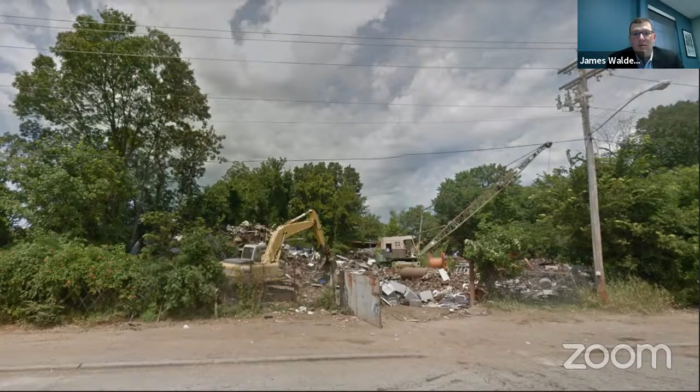As you all are aware, this started out as the scrapyard, and I think that's probably one of the really beautiful elements of this entire project—we're taking something that was literally so ugly and an eyesore within the community and transforming it into one of the best spaces in Conway. That to me is particularly exciting.

It's particularly neat about this project that it does have this high aesthetic quality that makes it so unique. In addition, it's going in the Markham Street neighborhood. I think this is a signal and commitment of how much that particular neighborhood matters to our community, and so I think that's very exciting as well.

So this is the overall design of the project. You'll notice at the top edge of the image, that's where water comes in from the north, and it winds along in that kind of snaky part along the side, where it's treated and then goes out.

So the idea behind this project is that there's sort of three elements to it. The first of which is that it's a water quality demonstration project. In essence, you could consider it a down payment on helping improve water quality of the storm drainage and water that we have going into Lake Conway.

So the elements coming in—runoff, pollutants that are coming into the site—the water will actually be leaving here cleaner than when it came into the site because of the unique plants that we have on there that will be absorbing a lot of those pollutants.

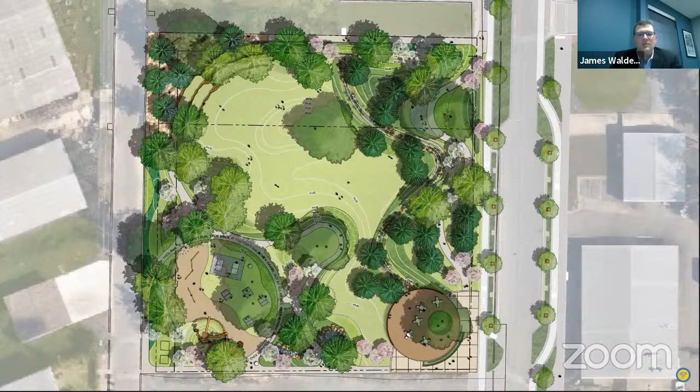From looking at the picture, you can tell that this is a very high quality urban park that is unique. We don't have anything like this in Conway. There really won't be a lot similar to it within Central Arkansas, so it's going to be a really unique asset that I think will be very catalytic in helping development within that area.

So, very important improvement that's being made. Looking at this, we've broken it down into several key parts of the park. The first being the entry plaza on the southeast corner. This is the area closest to downtown, and it's being designed in a way that's intended to help invite people into the space from downtown, traversing along the Markham Street corridor.

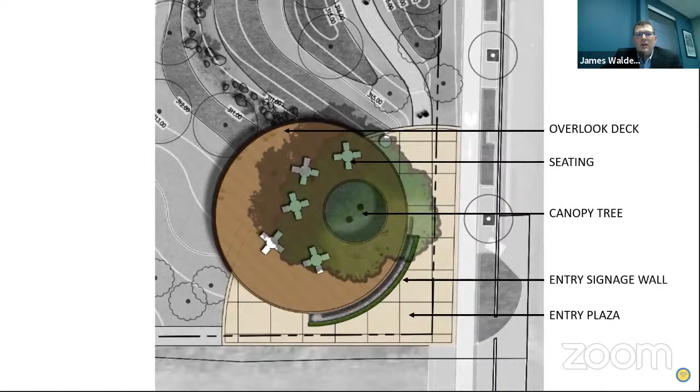As you can see in the image, we've got a nice plaza space, some artwork, which hopefully will be a quote wall dedicated to Dr. King. We may have some other type of artwork dedicated to Dr. King in that space, but it provides this nice inviting environment that says, hey, come walk in here, come explore it, come loiter. That's what we want you to do in a park—look around and enjoy the beauty of the environs there.

Our next is the bioswale—that's the treatment area where the water enters toward the north side and flows down to the south. You can see here all the beautiful plants as they would look when they're flowering. A lot of these native species, I think, will be really unique and interesting. If you've been out to the constructed wetland at Hendrix, that—or better quality—is sort of what we're looking at in terms of how that looks.

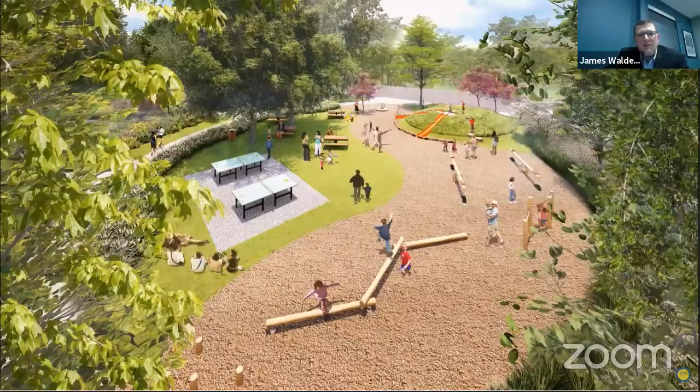This being a park, we wanted to have some level of play area that incorporates multiple things. We've got some neat elements in there—embankment slides for kids, a play area where kids can balance along beams, and table games that hopefully help incorporate some of the identity of the neighborhood, along with picnic tables. This is kind of the appearance of how that is—a place for families to bring children, allow them to run around, have fun, and enjoy the area.

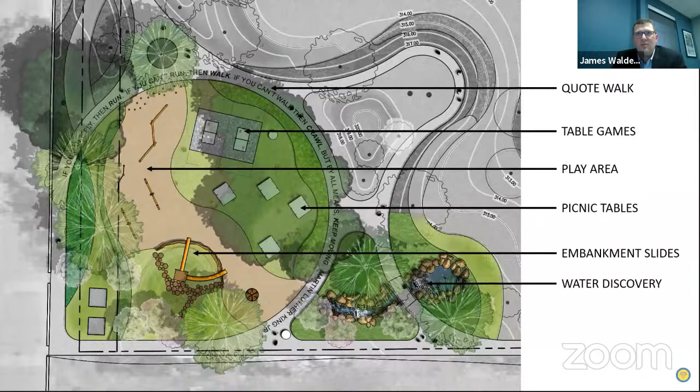You can't really see it very well on this, but going back, there's a water discovery area where—I'm not going to say water play necessarily—but in terms of looking at the water, there'll be some little mechanisms where kids can release water out of a certain area and allow it to flow down into another area. I think that'll be helpful and useful in understanding some of the educational aspects of why the park exists and what it's intended to accomplish.

Another is our performance area, and this is where we'll have essentially what amounts to a modified type of amphitheater. That's something that came up a lot in the public engagement and talks—there was a lot of discussion about wanting some type of performance space, even if it's an informal one.

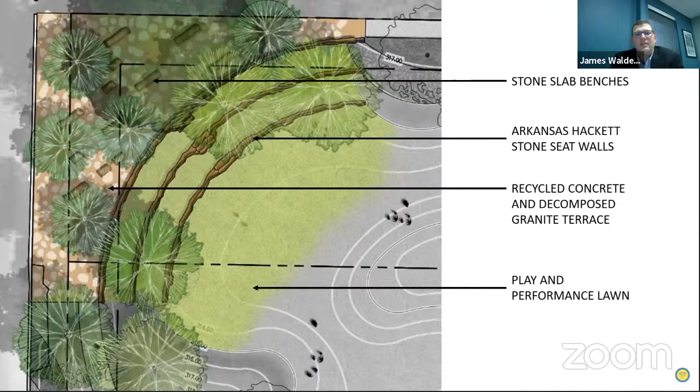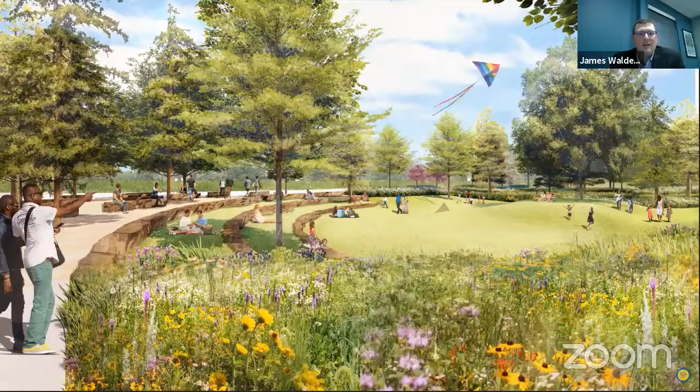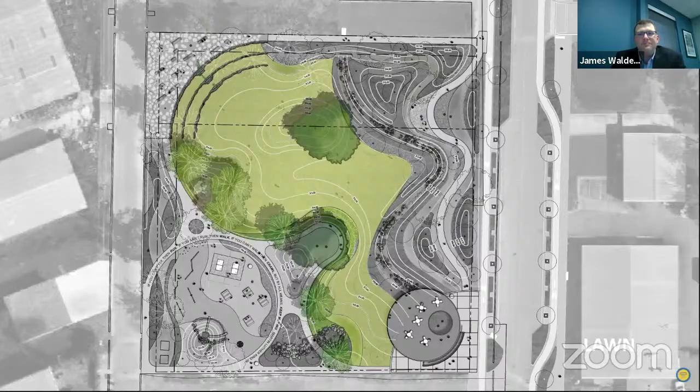Some of the neat elements there—it's going to use recycled concrete from the existing site, giving that connection to its previous use. We'll also be using Arkansas Hackett stone walls and stone seats, that really beautiful type of stone you see up in North Arkansas. There's actually a town called Hackett out in West Arkansas that has that. Those benches give it a rustic, natural look that pours out into this great lawn, which will actually be used for part of the stormwater storage or detention during rain events when it backs up. That's kind of the image of that—it'll have varying elevations through there that give it a lot of visual beauty.

So, again, this is a pretty beautiful park. I think it's something you all will be very proud of, that collectively the residents and stakeholders in Conway will all be proud of. I think it's going to be a very important project for us.

James, that looks great. I think you said 2022 on the start date of the construction. Is that right? Yes, sir.

Thank you. Who's going to do that work, James? That will have to be something that ends up getting bid out. One of the things in the consultant we selected, SWA out of Dallas, because this project is unique with a lot of unique plants, is that part of their proposal includes having people involved in the project during construction, to make sure the intent of their design is carried out. For us, selecting that group was very important because this is unique and different. There aren't many projects like it around here, and I think having that element will ensure we get a good quality product at the end.

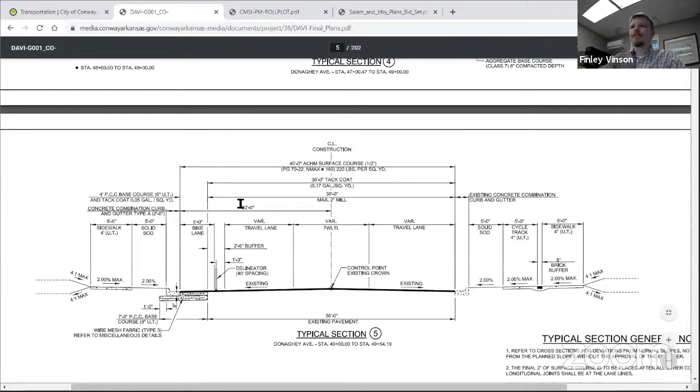Now I'm going to show you very quickly what Donaghey is going to look like. So this is, I'm going to scroll up just a little bit here. There we go. So on the southern section, starting at Dave Ward, Donaghey is going to have the first buffered bike lanes in Conway, we're excited about that. It's going to have bollards to separate the cyclists from the travel lanes.

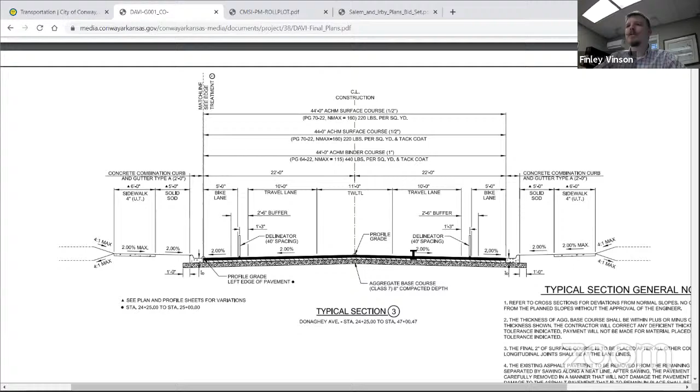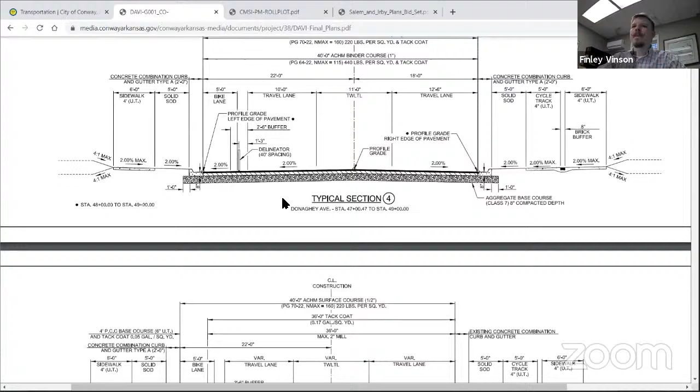We don't have a street sweeper that will fit in that space, so UCA has very kindly and graciously offered to help us keep those clean. As you move north, the street gets narrower, and we're only rebuilding the section south of Robbins. So we're utilizing the existing pavement to put in a buffered bike lane on the west side of the road, but we're going to put in a cycle track on the east side of the road, separated from the sidewalk by a brick inlay. Then as you move further north, the bike lane will drop at College Avenue, and you'll have cycle tracks on both sides. So that's what you can expect to see on Donaghey after it has been completed.

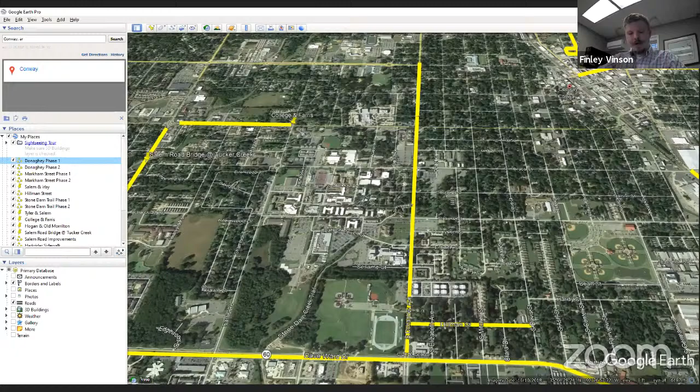I'm going to go back to my Google Earth here, and we've talked a lot about Markham Street already. As you know, phase 1 is under construction, and that extends from Van Ronkle to Walnut, which is right there. Everybody see Google Earth? Okay, good.

Conway Corporation and CenterPoint Energy are currently working to complete the utility relocation of that first phase. They're also working on the second phase at the same time. Construction of phase 1 is about 50% complete and is scheduled to be completed in the spring of next year. Phase 2, which will go from Walnut all the way to Harkrider, is scheduled to commence before phase 1 is completed, right about the same time phase 1 wraps up. The whole project, phases 1 and 2, should be completed probably early 2022.

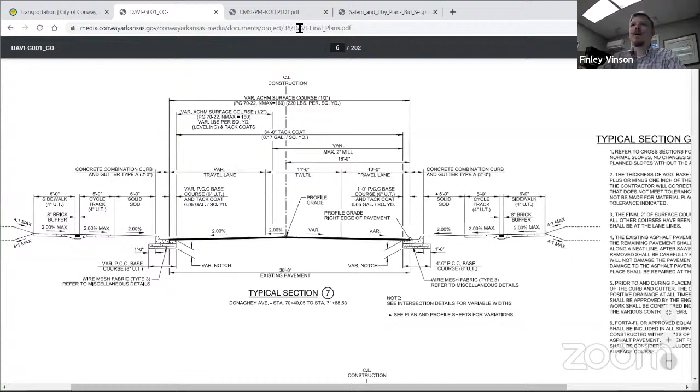That project is similar to Donaghey in that it's got cycle tracks. This was a Metro Plan grant, which required several things, including that it be bicycle friendly and pedestrian friendly. So it's going to have cycle tracks on both sides of the road, separated from the sidewalk by a brick inlay. It's also going to have bioswales, which will work in tandem with the Markham Street water quality project. We're excited about that one.

Now, Salem and Irby, we talked about just a moment ago. The construction here is ahead of schedule, and the final paving is expected to be completed next week. The project will be completely wrapped up probably in the middle of next month.

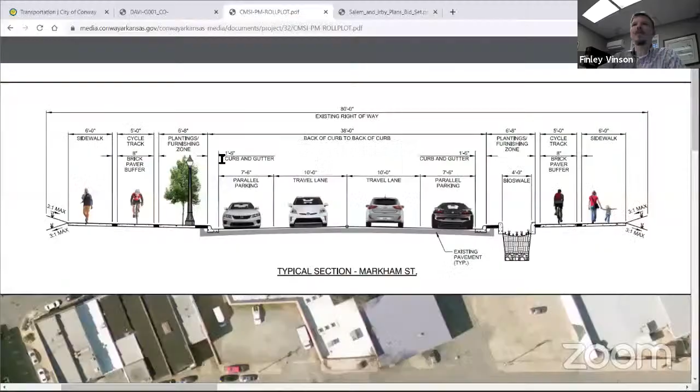This is what it looks like right now. Many of you have seen it already since some of you have driven through it, but this is what it'll look like when it's done. I've already heard a lot of compliments on this. We're really excited. My hat's off to the contractor and Conway Corporation — they've worked really fast on this one, kept traffic moving, and done a really good job.

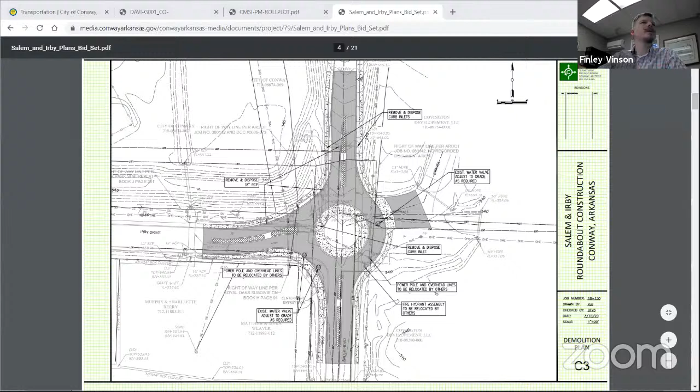Now we're going to go to Hillman, another one the mayor mentioned. Street crews are working out here right now. This is where it is. Utility relocation and drainage installation are underway currently. We expect that to be done early to mid-summer.

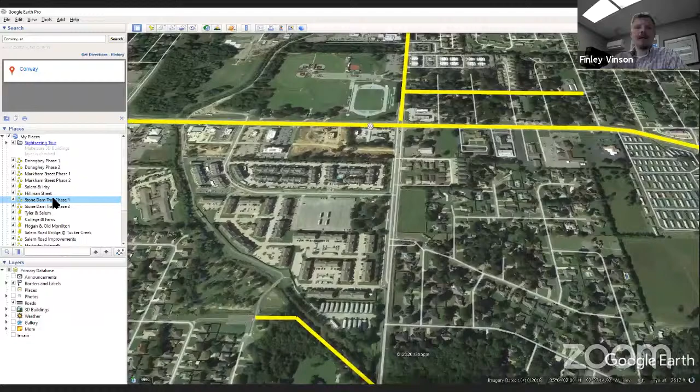So, a few other things we're working on. We're working on a bunch of grant projects right now. Stone Dam Trail Phase 1 is a grant project we won from ARDOT that takes us from Mimosa to Donaghey — that phase will actually take us underneath Donaghey. Construction is scheduled to begin this spring. Phase 2 of this project, which we have a current grant application to ARDOT out for, we hope to hear back favorably on. If awarded, that will extend the project all the way down to South German.

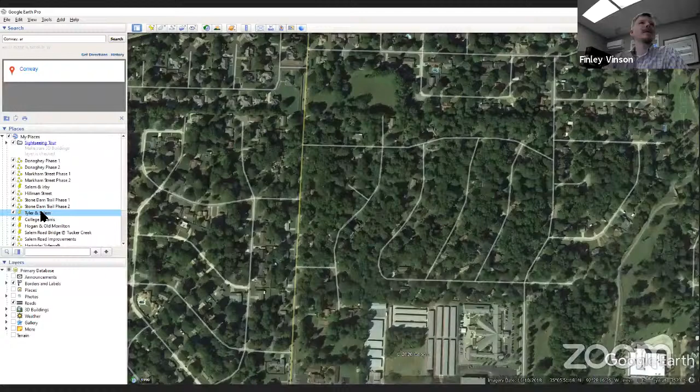Another roundabout we're working on is Tyler and Salem, right there. Our design is at about 60% right now. We're currently working on our right-of-way plans and legal descriptions. If you're at home listening and you live on one of those corners, don't panic — you're going to hear from me very soon. We've almost got the legal descriptions complete, and you'll be hearing from us.

Conway Corporation is scheduled to begin utility relocation at this intersection early next year, and construction will commence as soon as they're out of the way. Incidentally, I've got some preliminary plans on the website right now that show this, but I'll update those shortly to show a much better drawing of what that's going to look like.

The next one after that will be College and Farris. And you guys are all seeing Google Earth still, I hope. I'm still looking good.

So College and Farris, we're just about done with the preliminary design on this one. We'll be contacting property owners early next year to start talking about acquisition, and we expect construction on this one to begin in 2022. Another one we're all very excited about is the roundabout at Hogan and Old Morrilton. We finally convinced ARDOT to build a roundabout at this location, and they're scheduled to commence in 2022 as well.

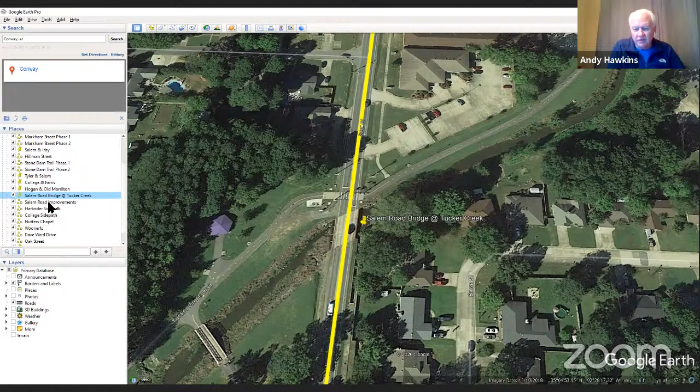You're welcome. And what is going to happen to Salem Road? Can you tell the people that live out in this area what we're going to do in this section of the road? Of course, that's another good question. We are going to add, the most important thing I think for the improvement of this road, the addition of sidewalks. As you know, there's an elementary school and a middle school right here, and so many school children walk and bike this section of Salem. We anticipate adding both bicycle and pedestrian access, most likely via wide side paths on both sides of the road. In addition, we'll be adding curb and gutter and proper drainage to the road as well. But what I'm most excited about is the bicycle and pedestrian accessibility.

On that note, we applied for a grant to ARDOT to build a sidewalk on Harkrider between Bruce and Robins. We're anticipating that ARDOT will improve Harkrider between Oak Street and Bruce, I hope within the next 3 to 4 years. But in preparation for that, we want to go ahead and build this sidewalk to connect Robins and Bruce, and we won that award. We're at 30% design for that sidewalk right now. We submitted that to ARDOT for review, and we expect construction next year on that.

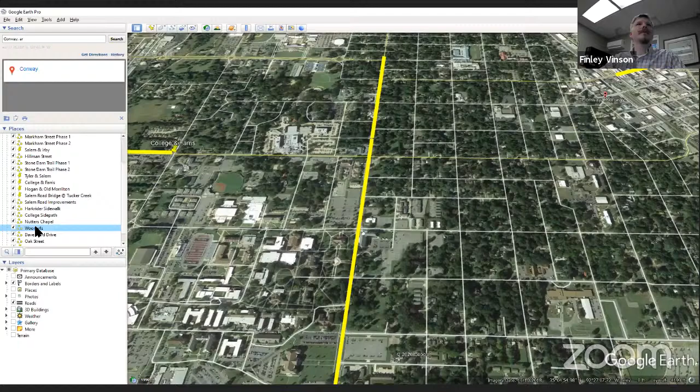And then lastly, that beautiful park project that James just got finished presenting on, we're working on another grant application. We're working on a preliminary design for two woonerfs, to use James's fancy term for a shared street, for Willow and Garland between Spencer and Markham. So the northern and southern boundaries of the park are two unbuilt right-of-ways, and we're putting together a future Metro Plan grant application to ask them to help us build these two shared streets here, as well as perhaps some improvements to Spencer Street to provide a safe space for people to interact and park and go to the park.

So that's mostly it for roadway projects. We've also got several signal projects we've been working on. I hope everybody has seen improvement to the signal timing on Dave Ward. We are wrapping up the Dave Ward Adaptive Project, which was a grant application we got from Metro Plan. We were awarded a similar one on Oak Street, and I'm very excited about this. The design is more than halfway done on that. Construction will start next year, and it'll probably be wrapped up by the end of the following year.

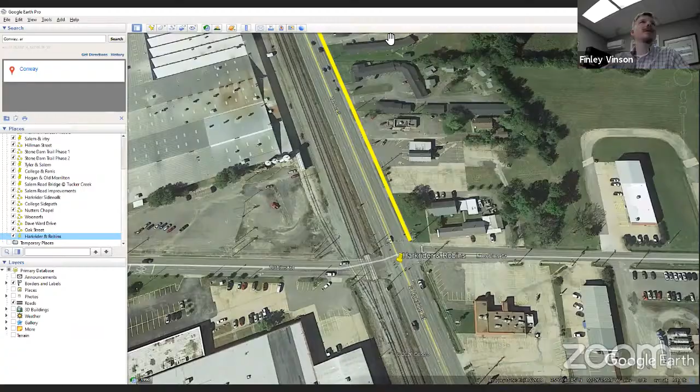In addition, we've got a contractor working to finish Ward 4 pavement marking right now. Once he finishes that, we will finish painting the entire city in the last 4 years, which is great because we had a lot of streets that were in dire need of some new paint.

We've installed over a dozen flashing beacons in the city. I've honestly lost count of how many we've put in, but I think it's been somewhere around 16. Those have largely been in and around school zones to make crossing safer for children, and we're continuing to work on that.

We've had a lot of good drainage projects. We just recently submitted a notice of intent to apply for a FEMA grant for a drainage study downtown. In addition, we wrapped up this year a state grant, which we won to acquire 10 houses that were experiencing repetitive loss near Sugar Creek that were in the floodplain.

One of the things we've been continually working on since soon after the mayor took office is clearing some major creeks and drainage ways in town that were overgrown. We've cleared over 14 miles so far, including Gold Creek, Tucker Creek, Stone Dam Creek, Railroad Creek, and a bunch of other creeks that don't have names. We're currently working on Stone Dam Creek.